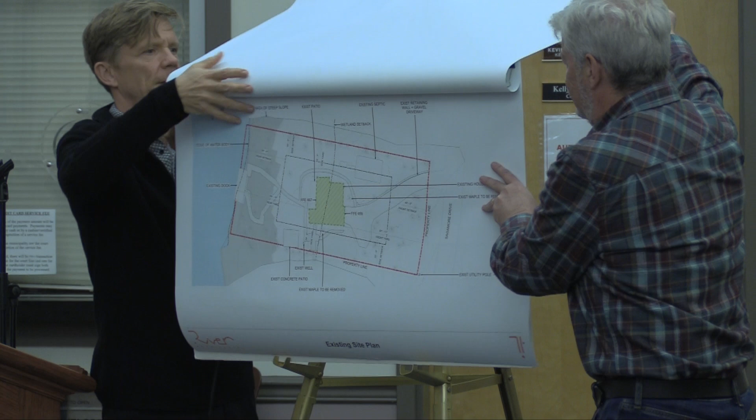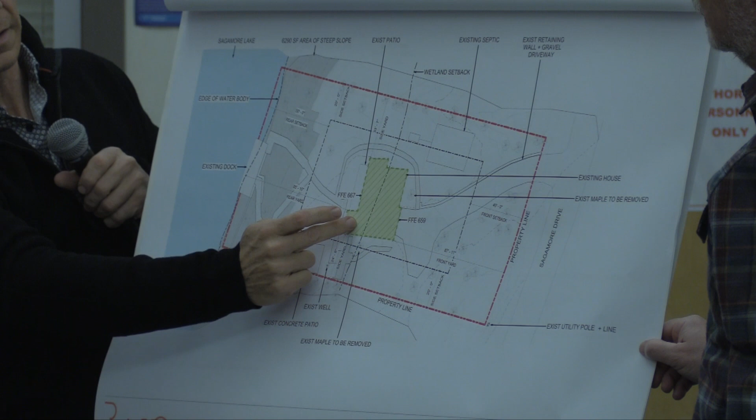I have drawings here I can walk you through. This is a Google map view—we're on the eastern side of the lake. The green outline shows the current situation of the house, and this dashed line is the buffer zone, the 100-foot setback. You can see how the house currently encroaches on that buffer zone. These are the setbacks, just for reference.

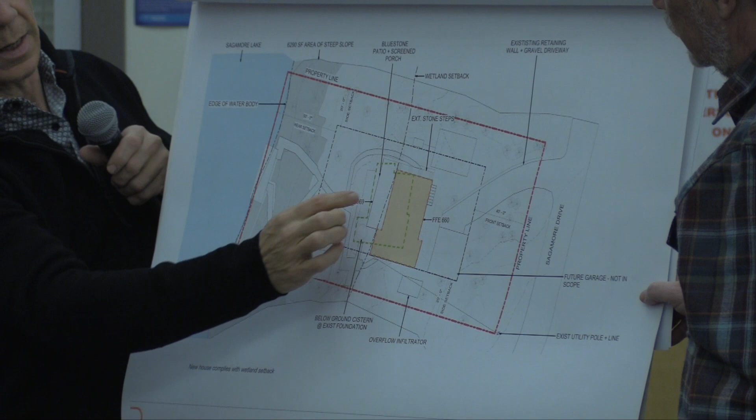This is the proposed location of the house, pulled back, shown in orange, with the green line showing where the original house is situated. There will be a patio and a screened-in porch, but no conditioned or regularly occupied space within that setback. The existing foundations will be removed as much as makes sense—if we completely remove them, we might have more soil stabilization issues, so perhaps we'll break them up and abandon them in place so there's less site disturbance.

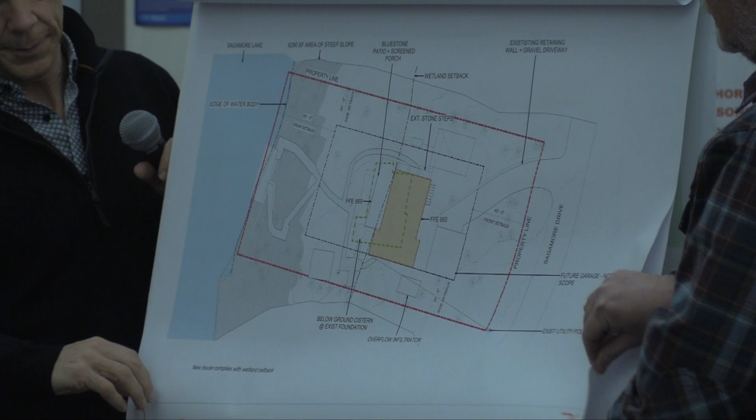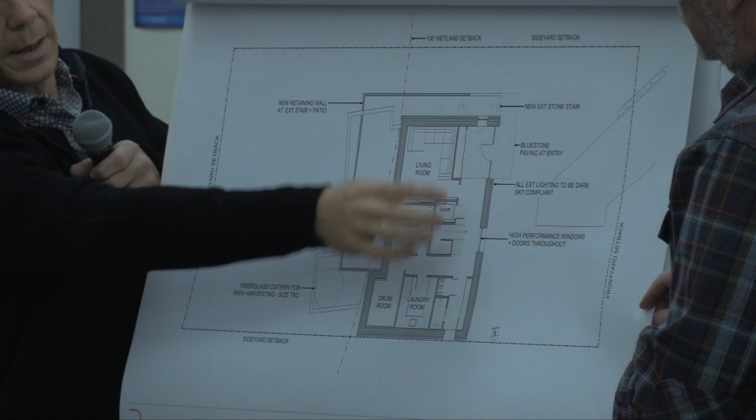This is a zoomed-in view showing the basement walkout level. On the Sagamore Drive portion, the property comes up to a ridge and slopes back towards the road, so it's a walk-in condition on the lower level—you can see some basic entry situations here. In the existing foundations, we're proposing to situate a rainwater harvesting cistern so that rainwater from the roof is collected first, with any overflow directed out towards the west or east.

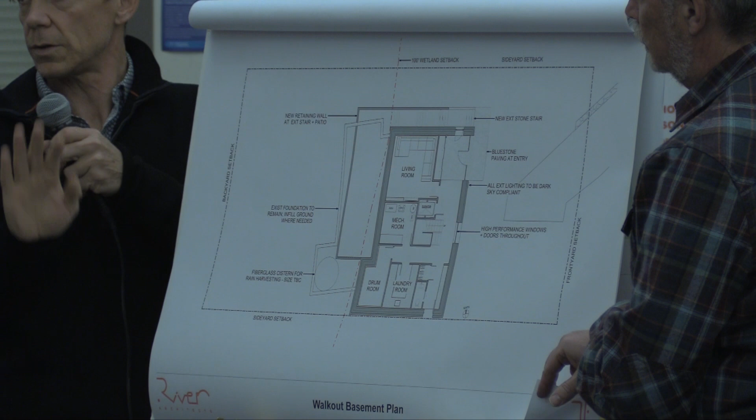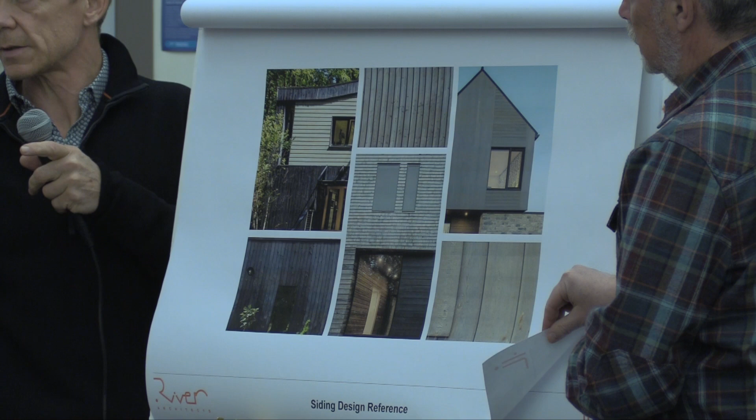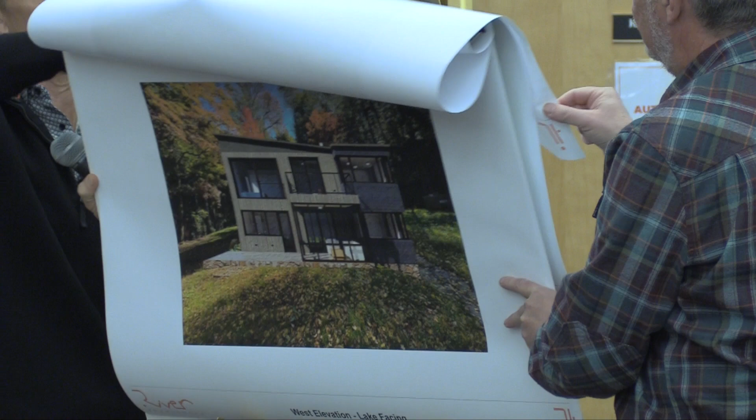And on the lake side, the two stories are visible, low roof line, and here you can see the screened porch there. That's pretty much our presentation.

Okay, very comprehensive presentation, thank you. Any comments from the board? No.

We'd like to open the public hearing at this point. Any comments regarding this project?

Okay, so we'd like to adjourn the public hearing until the December 12th meeting. We understand you're awaiting a zoning board of appeals decision? Yes, we've submitted to get onto their calendar. Right, okay, so we're going to adjourn until next meeting.

I make a motion to authorize Bruce and John to prepare a resolution for board consideration at the next meeting. All in favor? Aye. Second? I'll second. Aye. Okay.